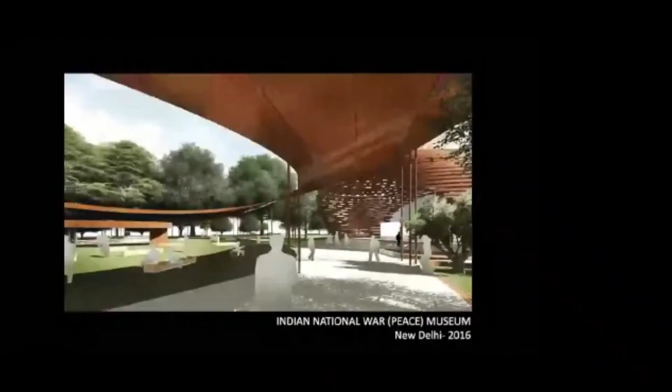So what you see over there is the Peace Pavilion. The ring and the dome over there are a part of it. The entirety is the Peace Pavilion, and the dome is inspired from the stupa, because it's Buddha, the peace, and so that is where we got the inspiration for the dome, and it kind of mimics the stupa. On the ring, the names of the peacekeeping mission martyrs are engraved. So that becomes a part of the Peace Pavilion. So this was the entry point of the museum.

You could go to the next slide, please. Ritika, can you go to the next slide, please?

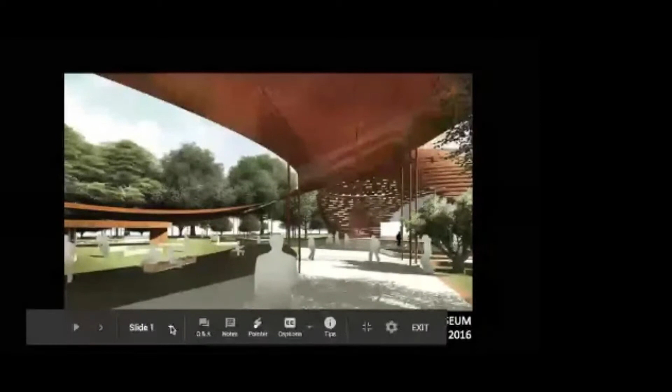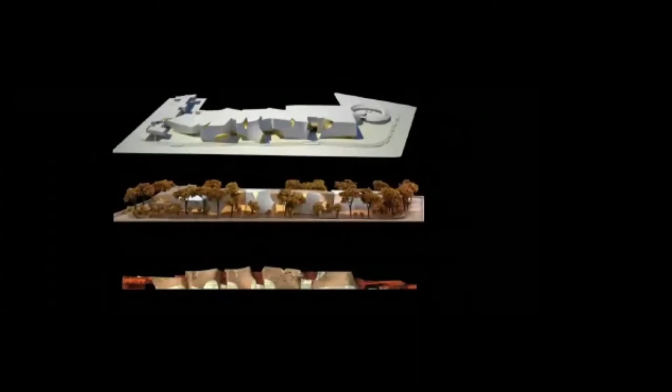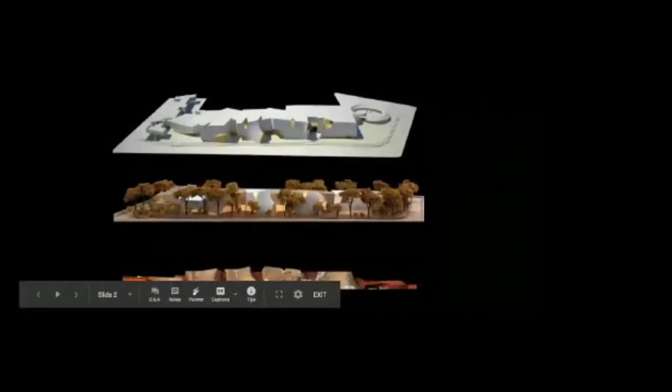Okay, so what you see on the top, can you see that ring over there? In the white model, that ring and the dome became the part of the Peace Pavilion at the entry of the museum. And what we also did with the museum was, normally public spaces, museums and all, are open from about 9 to 5, and the public is restricted from entering these areas after those hours. So we thought, let the museum play a very important role in the urban space, and give the space back to the public to occupy as much as possible. So unlike what is currently happening with the Central Vista, where the essential public space is being taken away, our museum played a completely opposite role.

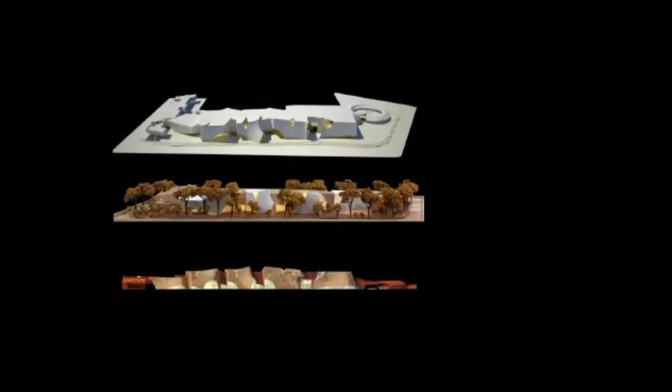If you see the site, that is the boundary line that you can see outside. So we pushed back from the boundary line, gave that space to the public, and created the front area. I wish I had the screen so I could point it out. But what you see in the front area is the entire length along with the entry, a place where people could jog, hang around and occupy that space from early morning to late night. And we also created other places which the public could occupy, which I will show you in the further slides.

So what you are seeing over here is the front. This is in the main area, which is the Princess Park, pretty close to the Rashtrapati Bhavan. The height limitations, if you see it's almost flattish, is purely because we had a height restriction and we could not go above the height of the Rashtrapati Bhavan. So could you go to the next slide, please?

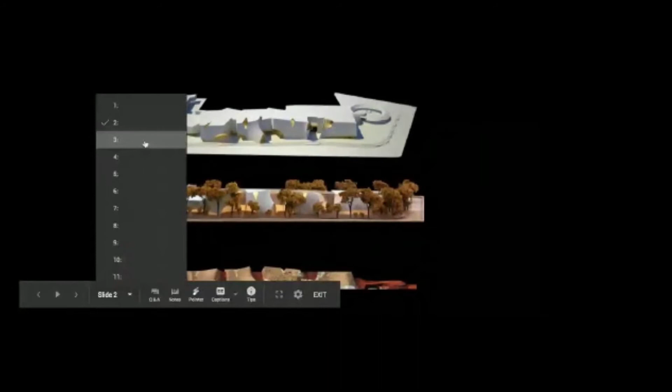Okay, so with the design of the entire museum, a good museum always has galleries which are light-filled and dark spaces, to have the right balance for the kind of displays that need to be created inside. The white boxes in the front are all the light-filled galleries, which were double and triple volume in certain parts. And the back portion, the wooden area, is what we called the black box, which was the darker part of the gallery. Next slide, please.

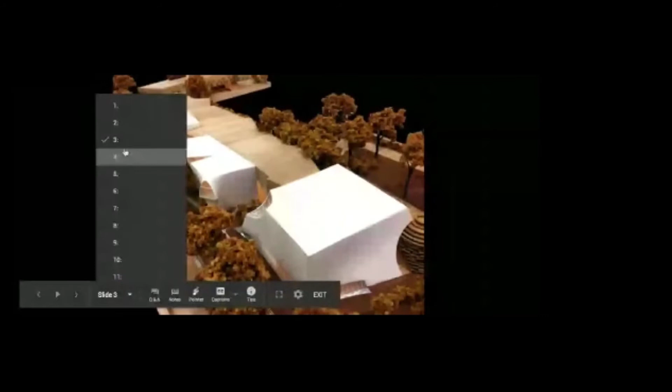Okay, so again, this is the model of the museum, again showing on the complete left-hand side, as you can see, a longish structure which was a part of the library, which had restaurants, library, an amphitheater, and the viewing gallery. So that area also was a part which was activated even beyond the museum hours.

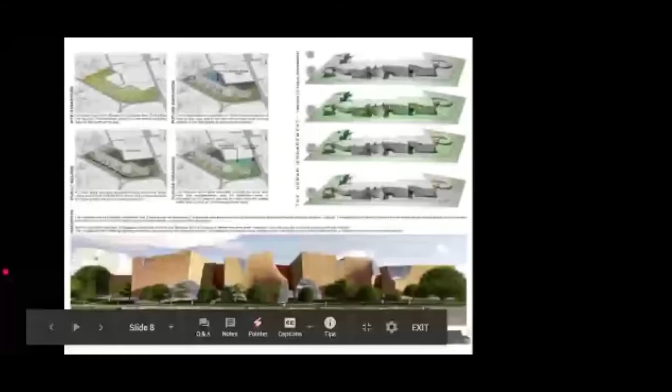Next slide, please. Sorry, I want to explain the top slide. No, 1 second, Ritika, just stay on this slide, please. I don't know how clear it is on this one. If you can see the top right-hand image, which shows four different aspects of that model, whatever green is highlighted in the particular model is the timeline. I don't know how clear the hours shown over there are.

So basically, the topmost, where the entire front area, as I told you, was given away to the public, the front area was activated from early morning hours, say maybe from 5, 6 o'clock onwards till 9 o'clock, and in fact throughout the day it could be utilized, till the late hours. The second part of the model, the entire thing is green, because the entire area, including the front, the entry, the museum, the library, and all those other zones was also going to be activated from 9 o'clock to 5 o'clock.

And the third one that you see is once the museum hours are over, say by about 5 p.m., the front zone, that is the Peace Pavilion, is still going to be activated. People should be able to access that area post that till about 7:30, and also the front area, and the restaurant and the other zones. What happens after about 7:30 is that the amphitheater, the restaurant, the libraries are still activated till late night hours, say till about 1 a.m. The front area outside the Peace Pavilion can also be activated during that hour.

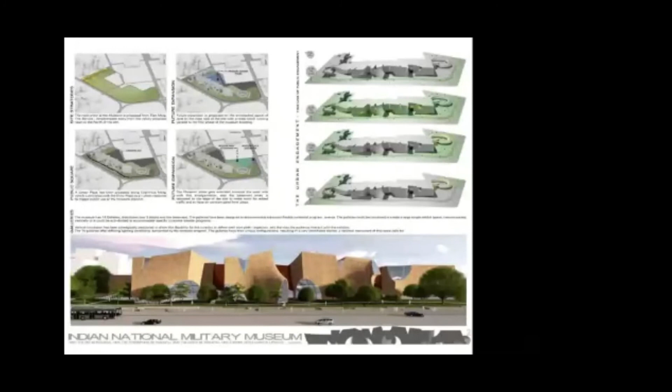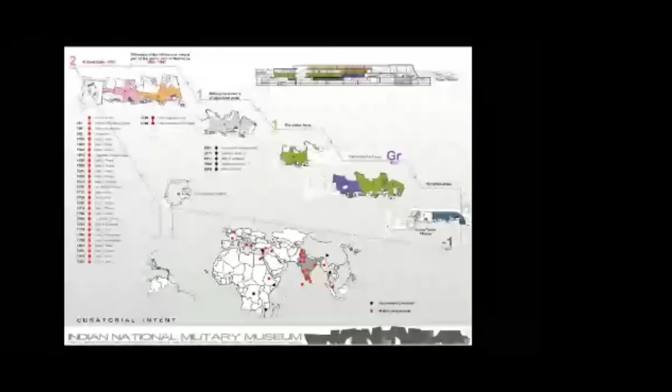So basically, the entire idea was to make sure that it's a very activated urban space rather than just one more monument, one more space which is accessible only at certain hours and then locked up. You could see the philosophy of nonviolence, which was an integral part of the nation and its democracy, given prominence as a display over there.

And as you can see, I don't know how clear the dots are. But if you see the map below, there are red and black dots. The black dots indicate the peacekeeping missions. The red dots indicate the military engagements, but the black dot indicates our peacekeeping missions, which the country has participated in over the years, again mentioned in the list. In 1961, the annexation of Portuguese India. In 1971, Operation Cactus Lily. Again the Battle of Longewala, 1984 Operation Meghdoot, and 1999 the Battle of Tololing. And this is how the entire display was then curated.